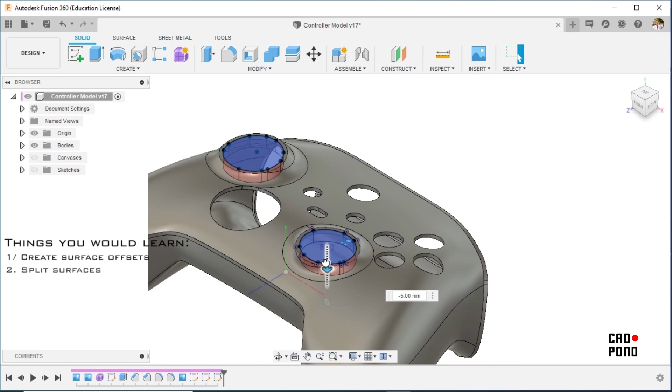In this video, I will be demonstrating how we create an offset surface of our solid body, how we split these surfaces using our created sketches, and how we thicken these surfaces to create the case shells for the controller pad. Then we're going to create different components of the controller casing, and lastly create holes which will be cut into our casings. Alright, so let's get into this.

So right now we have our sketches created from the previous video, and everything is set for us to proceed. The first step is to create an offset surface of this body. So we go to Surface, and then under Create, we see Offset.

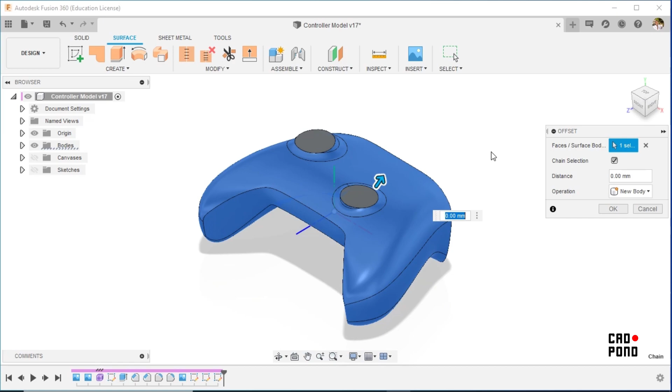Clicking on Offset, we have faces or surface bodies, so I will simply select the body here and rotate to see what has been selected. We observe that these two faces here were neglected, so I would include these too. Having done that, I have a distance of 0, and I say OK.

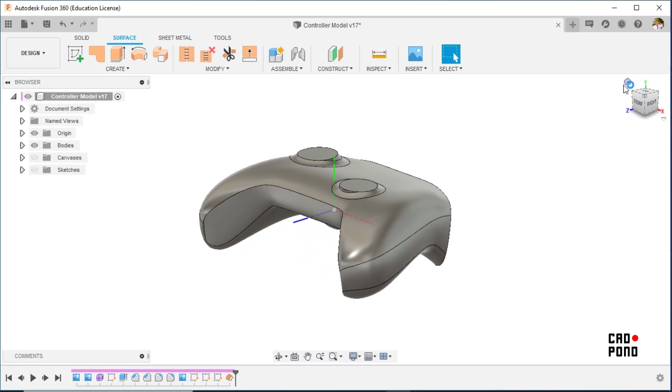Something to know about this particular phase of the project is that creating the casing in any other way right now seemed impossible, which is why we're taking this approach. We're also going to observe some processes that naturally should not be used, but that's what we're going to work with to get what we desire.

Alright, so having done this, we have created our bodies. If I click on this dropdown, we have the surface body here. Next, we're going to create cuts and splits on our surfaces.

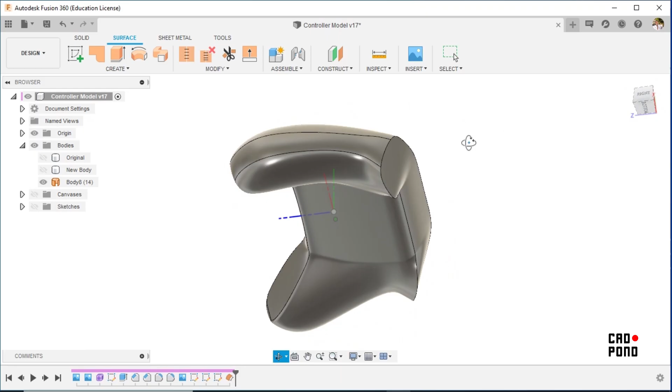To begin, I go over to Solid, Modify, and select Split Face. The split face tool allows us to select a particular face and then also select a particular sketch to cut through that face.

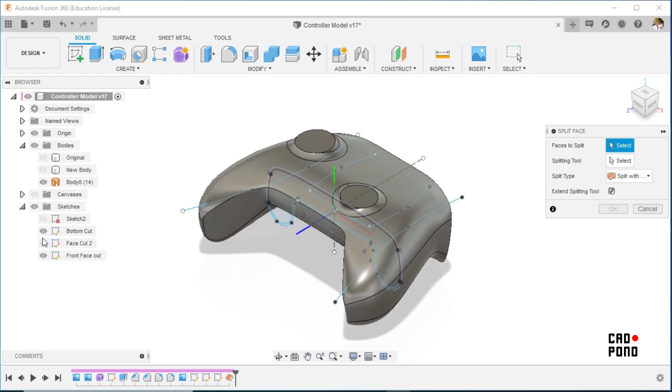For this we need our sketches. I begin with the face to cut — I start with this cut here — and then for the faces to split, I select this face. For the splitting tool, I select this.

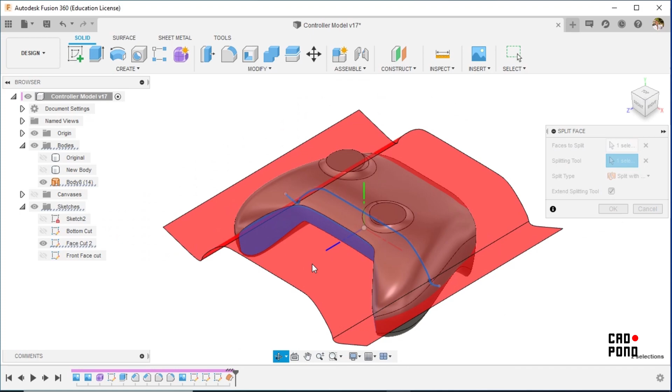I also click on Extend Splitting Tool. We don't have to worry about what else the split tool is passing through, as long as the face to split is the one highlighted in blue. So I click OK, and we notice we've split this face into two parts. It's nice to see this worked properly.

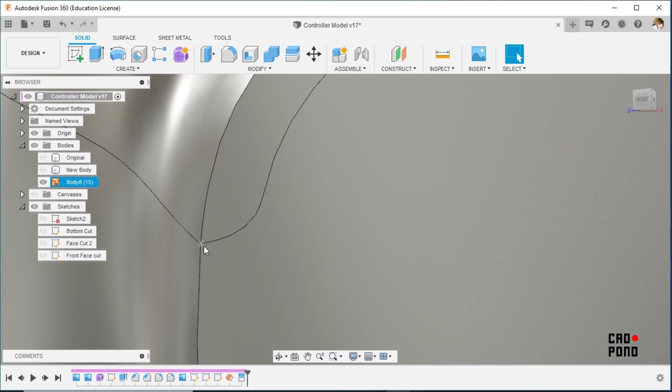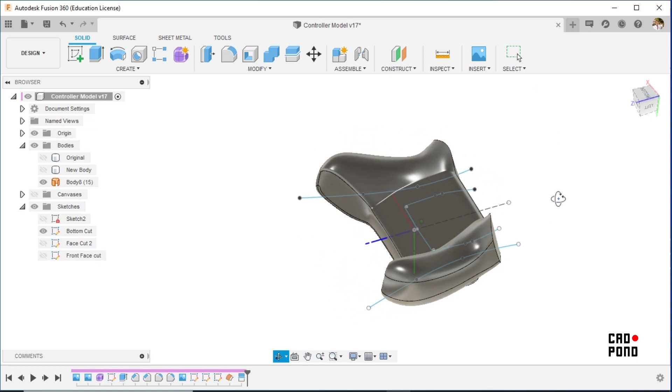And the same thing here. Alright, so we proceed to the next split — this has been used, so we go through the bottom cut. I rotate towards the bottom part and repeat the same process.

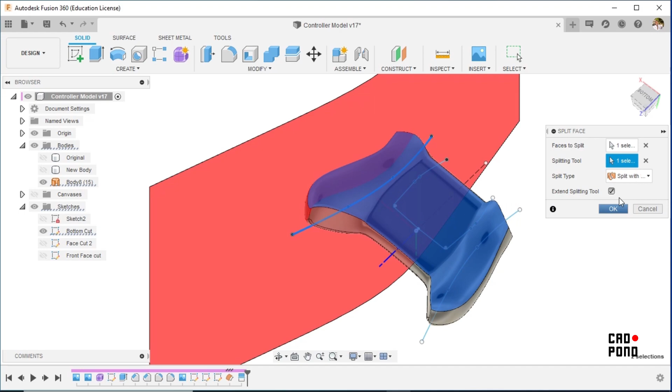Split face: my face to split is this face, and my splitting tool is going to be this one. Alright, I guess I have to split it one by one, so I'll click OK.

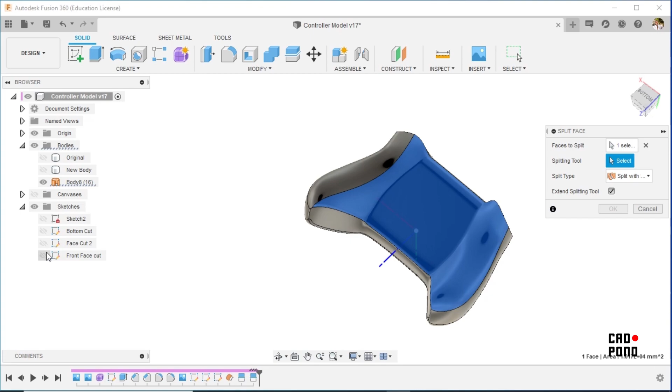Repeat the same process: I right-click, drag up a little, and drop on Repeat Split Face. For this face here, my splitting tool — the bottom cut — is going to be this one, and OK.

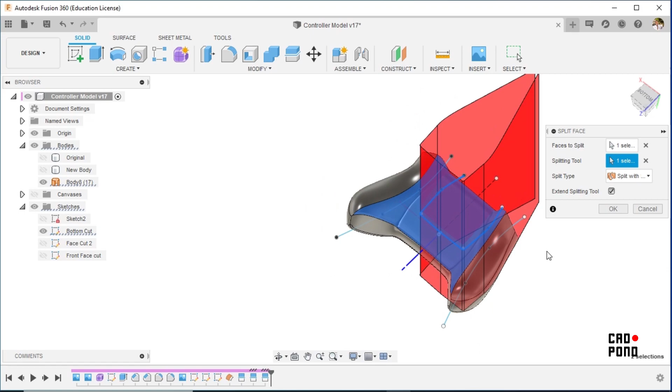And then lastly, repeat the same process here. For this middle face, the split will be this and this. Alright, so we have this, and we are good to go.

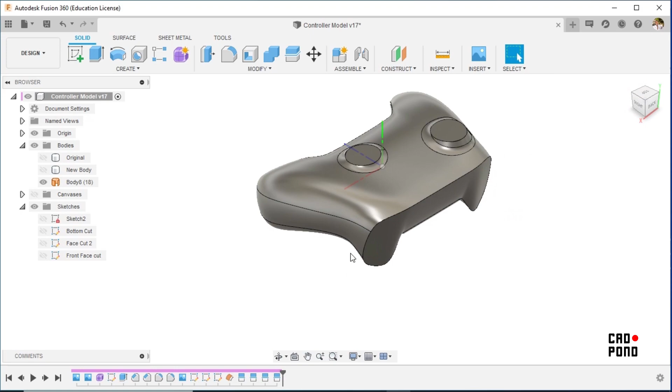So with all of this now, the next step is to cut this face here. How do we do that? I right-click again, drag up, Repeat Split Face, and select on this — it should be this.

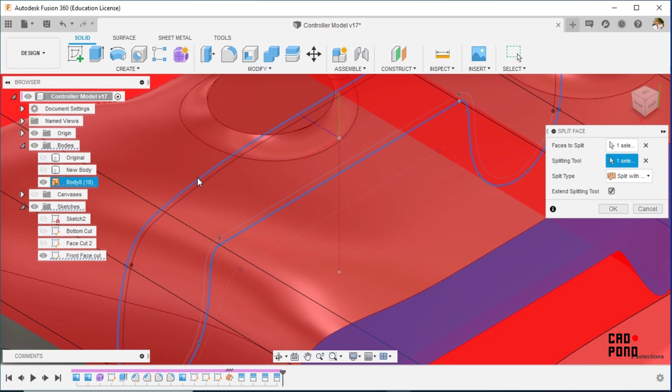Alright, and then we use the split tool outside, not the one placed within. So with that split tool, I click OK, and good enough, it worked well.

Lastly, we repeat the same process: Repeat Split Face, select this face, and this time we use the inner sketch, and say OK.

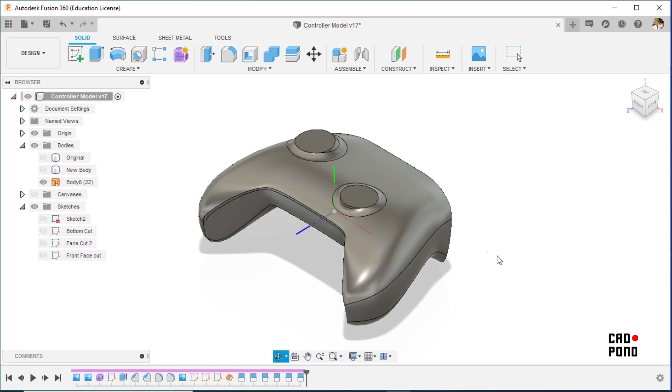Alright, so with all of this done, I'd say we are very close to completion of this video. The next step is to create thickness — to thicken the surfaces we've created, because right now they are simply faces and we will have to thicken them.

Alright, so what we would do first is put all of this within each other. I select from this, hold shift, click on this, and sort them into a group.

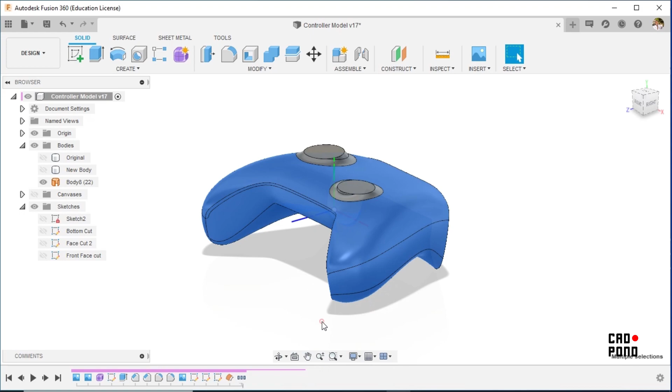At this point we go over to create and then click on thicken. The funny thing is that when we create a thicken feature, the software says to select the face to thicken and specify a thickness value, but it doesn't necessarily create the thicken in the direction we want. It creates it in a normal direction, but not necessarily the one we want. So in the case where we have a surface that is inclined or bent, like what we see here, the thicken feature is also going to be bent, giving us a thickness that is not necessarily parallel to the top plane.

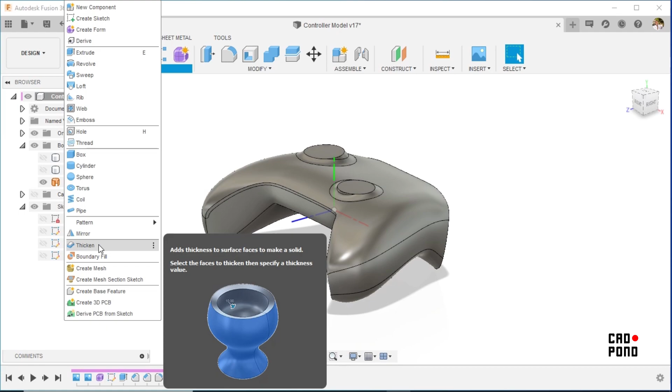I'm not sure you understand what I mean, so I'll just show you. In this process, we are going to thicken our parts, the surfaces, bit by bit, and then use the join command to bring them together. We're doing it this way because any other way gives us an error where the system is unable to compute the thicken feature.

So I'll use thicken, beginning with this top face here. You'll notice it's trying to select all the faces, which is not what we want, so I switch off chain selection and start with this. It's going in the outward direction, which is not our desire, so I'll take this to be minus 1.5 in the opposite direction. Then I say new component and select OK.

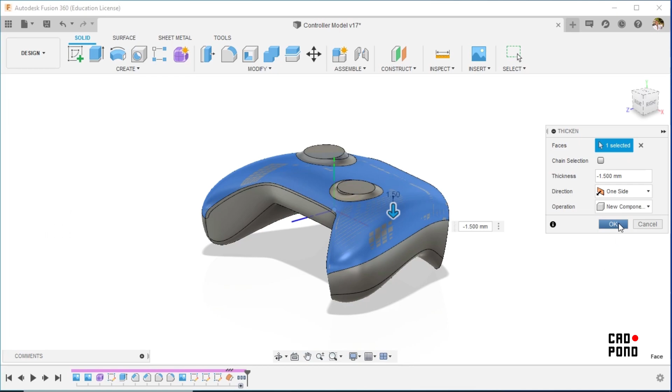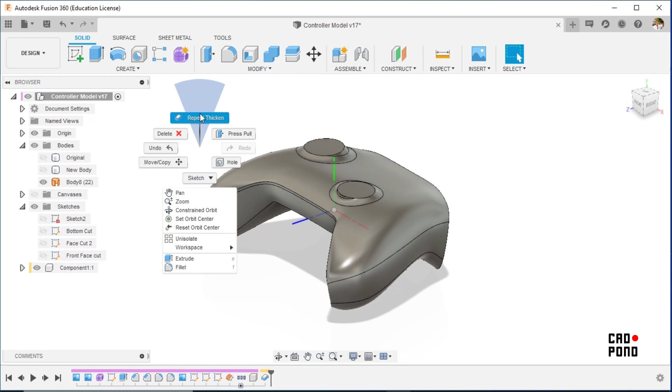Alright, so for now we have the very basic part of this, and this is not all we want for this top face or top case. So we bring back the surface body, make it visible again, and repeat the same process with thicken. Remember the chain selection is switched off, so I select the next one. With this selected, instead of using new body, I say join, and what it does is join what we have to the previous body, as you see here.

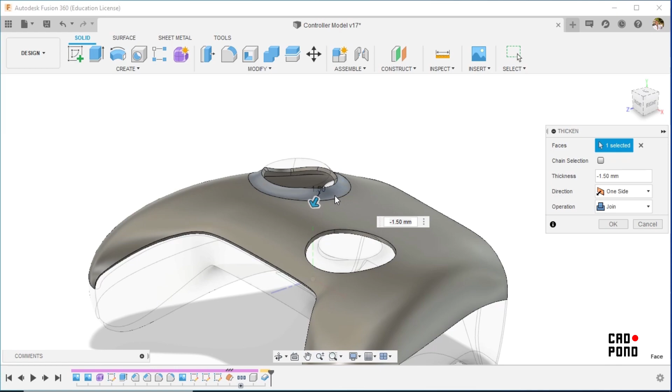Now what I was saying is, if you look at the thicken here, we notice it's not straight in itself, but kind of bent, taking the normal direction of the surface points, which is weird, but we have a way around that. I'll click OK and keep repeating the same process until we complete our top face.

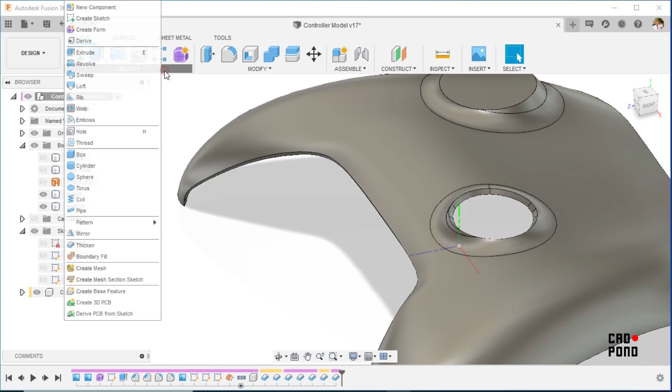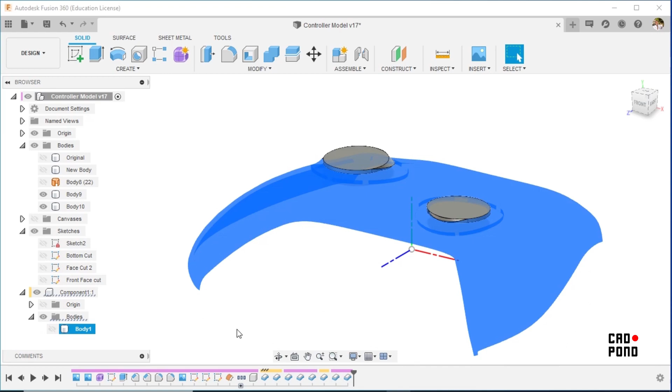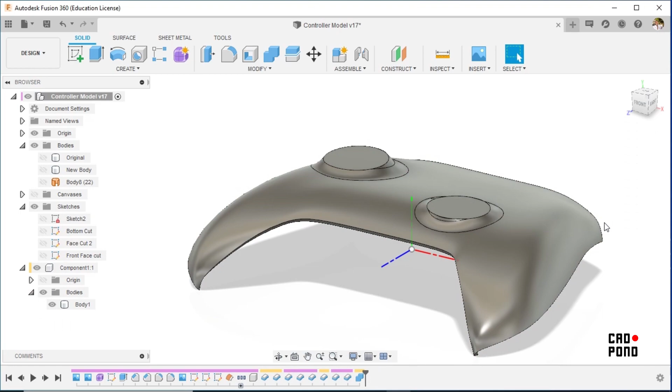Alright, so with all of this now we have just one component, which is all of these top faces. Next we are going to create for the bottom component, and that's going to comprise of everything: 1, 2, 3, 4, 5, 6, 7.

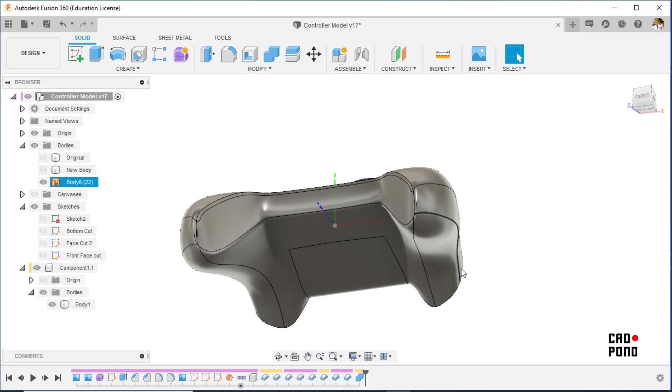Alright, we are probably going to separate them to make it look quite nice. So what I'll do is take this minus 1.5 in direction and call this a new component, and say okay. Alright, so that's this. Then we go over to the rest.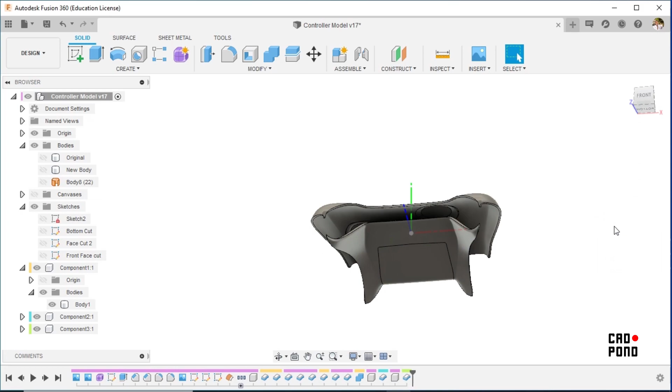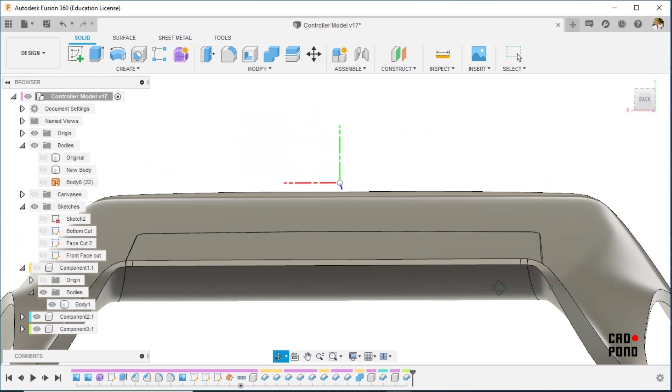See this, alright, create thicken, 1, new component, and so we have this. Let's check how this was extruded - that looks pretty good. If I switch this off, the thickening is quite good enough, except at this point, which I have no idea why.

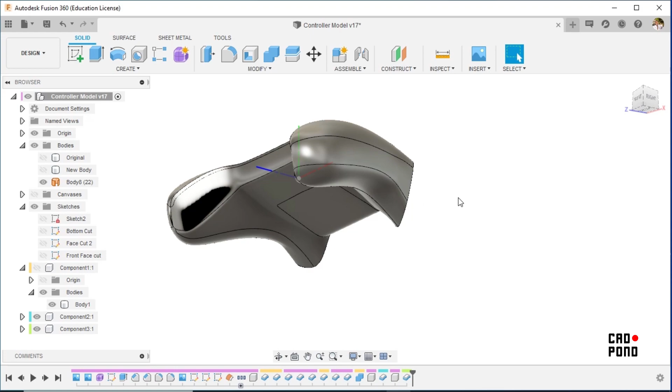This is this way and this is this way. Alright, so that's fine. And so we proceed. Since we have 1 and 2, I suppose I would simply join 1, 2 together with all of this. That's what I will simply do. I'm not really sure how the bodies are assembled yet, so it's going to be a little bit weird what I'm doing right now, but I would include this and join to this component.

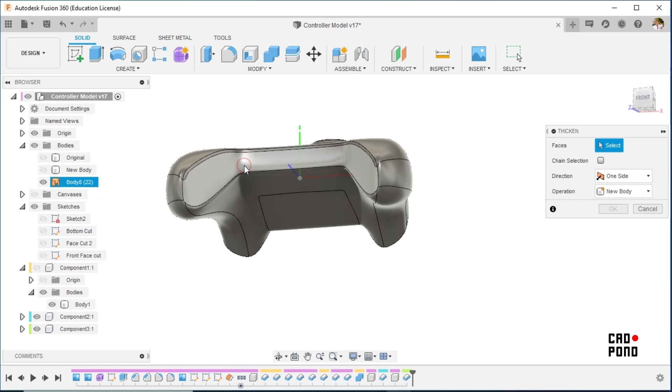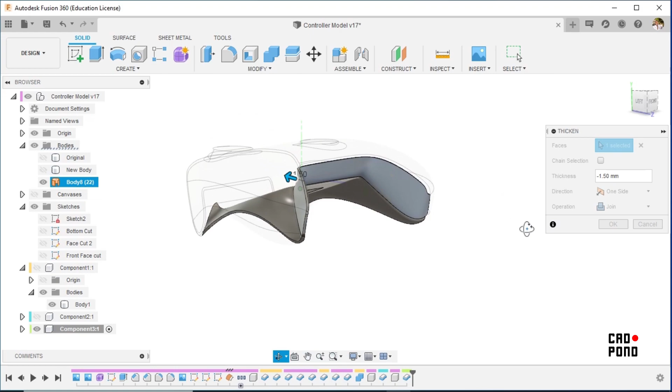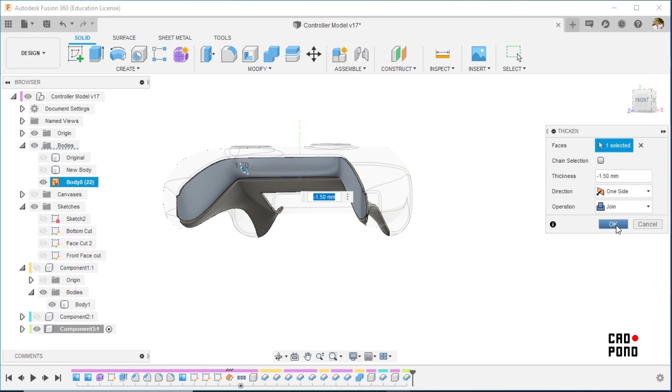So for now I think I'm going to switch off component 2:1, which is this. With this selected, I'll say new body, join. So I'm joining it together with this. I guess the way the software works, because I don't really understand it, is that the bodies that are visible, or probably the previous body created, is what the new component is joined to. I guess so. But if that's what it does, then let's say it's pretty smart.

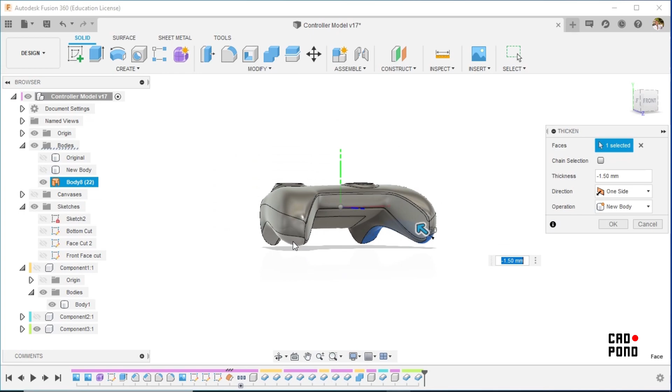Alright, at this point we have just a few things left to do. So I would create thicken again, repeat thicken, and select on this. Let's see if I can also select on this. Alright, so I guess I'm not allowed to do so. So I would cancel this and simply select on this face, going inwards by minus 1.5.

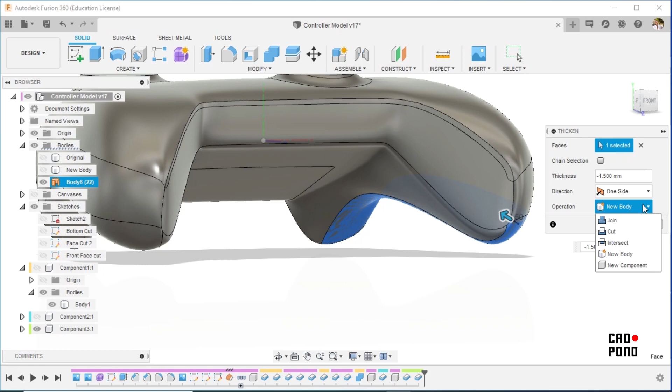And this should be, let's assume, or you know what, let's join it together. So right now I have a reason for doing that, and later on we are going to figure that out. So I repeat the process for the rest of the faces remaining.

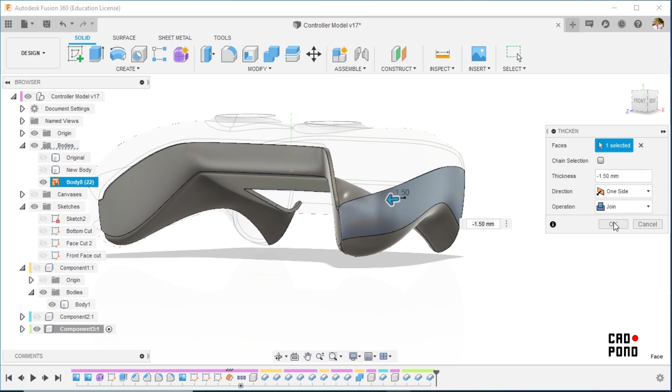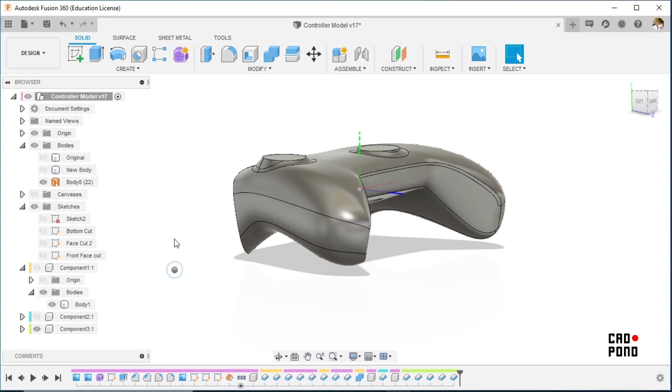So we have this face, join, and okay. And lastly, around this corner, body, right click and drag up, repeat thicken, this, join, and okay. And then this face, join. Okay, so at this point we have our bottom face, our bottom component, the cover here, and we have the top component also.

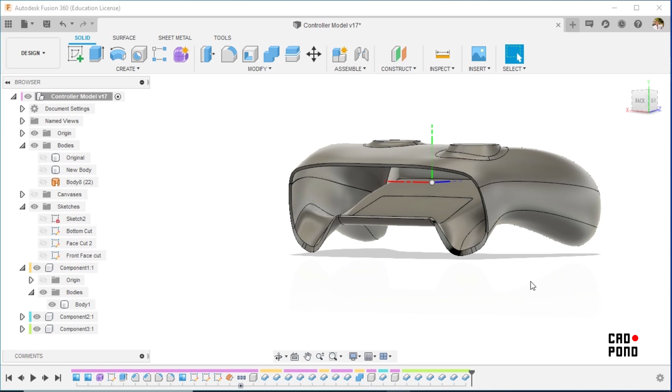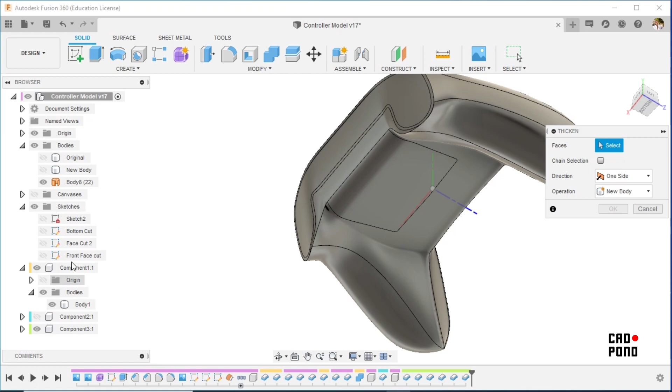However, we don't yet have the back part of this here. So what we would do is simply switch this back on, and this is going to be joined together with this body. So if I right click, take it to repeat thicken, I switch this back off, I switch this component back off. So what we have is simply this, right?

So what I'll do is I'll select on this face. Let's see how it creates its thickening. Alright, so it's a little bit weird, and I guess we're going to have to make some slight changes to what we have right now.

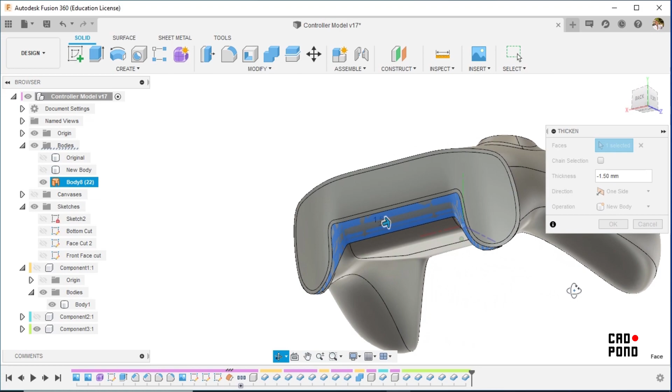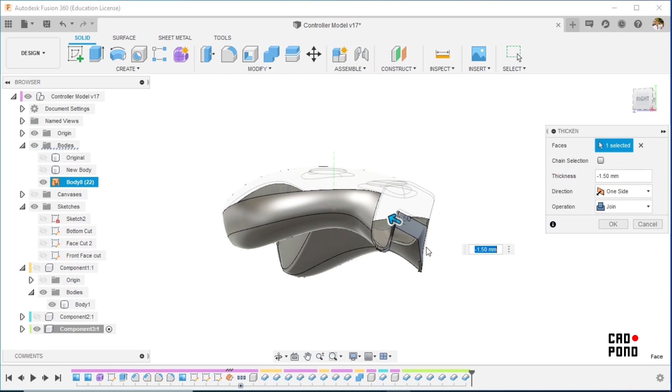Let's see. Alright, you know what? I just have to cross check what we have here. It's cutting in this way. So, alright, no problem, we create join. So we're joining it together with that body, which is this way, right? And I would say okay.

So to confirm all that we have, let me bring back the components. So we have it this way. Yes, and yes. And lastly, we're going to create an extrusion for this face here.

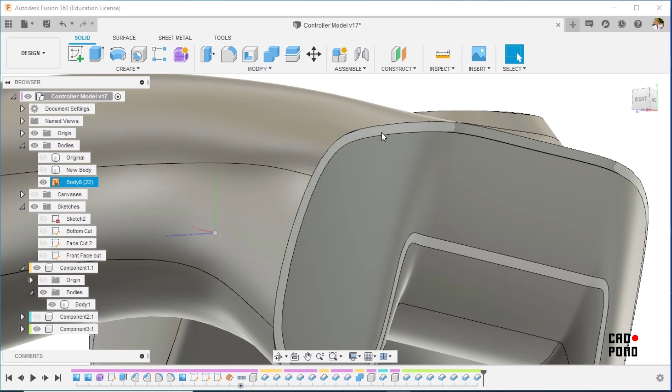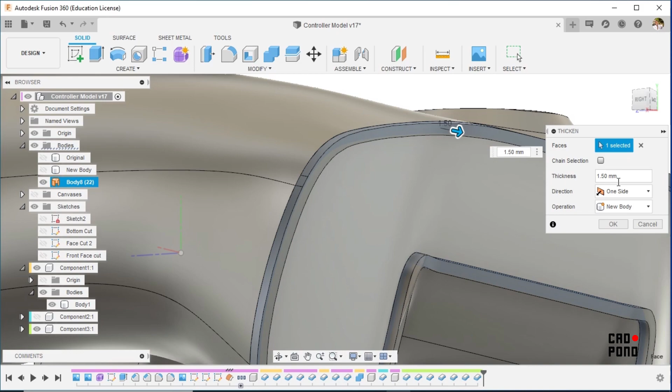But for this face, I suppose it's impossible for us to thicken that, because I tried a number of times and it was not working the way I needed it to. So if I made this 1.5 going outwards, it actually does work. That's great. So we click on new body and okay.

And then with that done, what we will just have to do is to join this body together with this. So we need combine. This is the target body, and then the body to join together with it, it's going to be this body here. So the second body is this, and say okay.

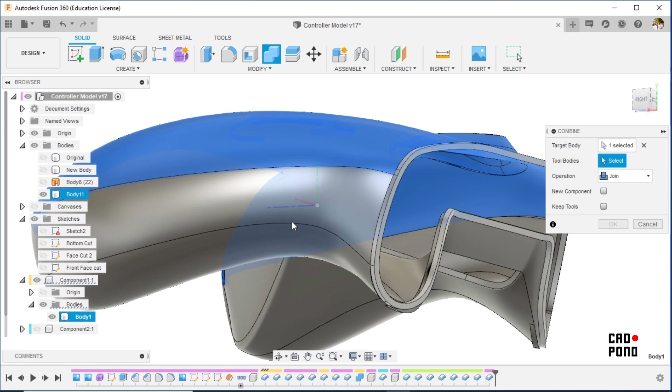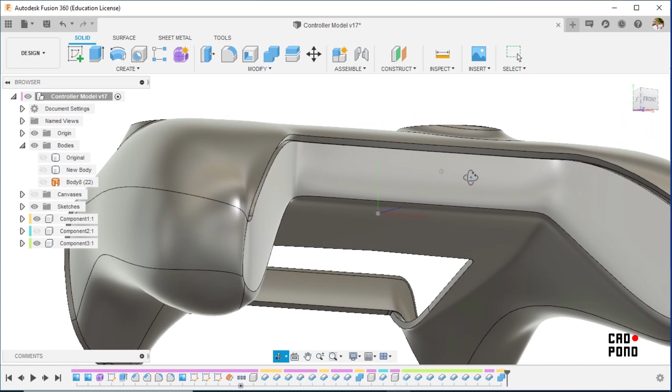So for now, this is what we have, and we proceed to the last part of this video. So at this point in time, I have actually missed out something. Alright, so to do that, remember the parts that was cut out here, I haven't included that.

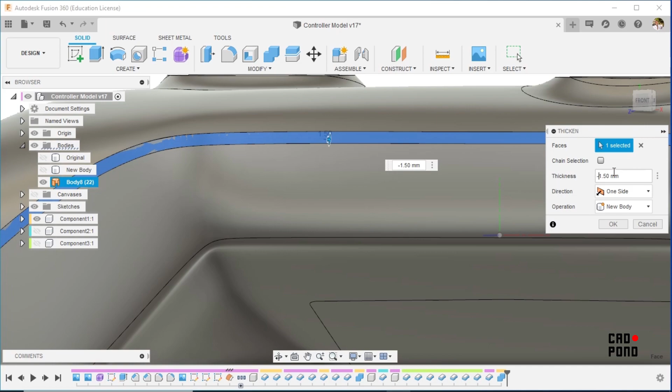So I pick up my body again and say create, thicken, and this is a face to select, and it's going in minus 1.5 millimeters. That's this going inwards, and then I want it to also join. So hopefully it's going to join to the proper component, I suppose.

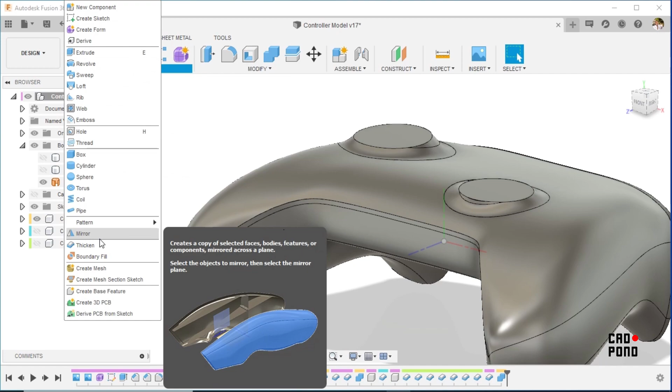Alright, so it doesn't, which is kind of a bummer. So what we'll do is I would say create thicken. I would create it separately. That's this face, minus 1.5, new body and okay.

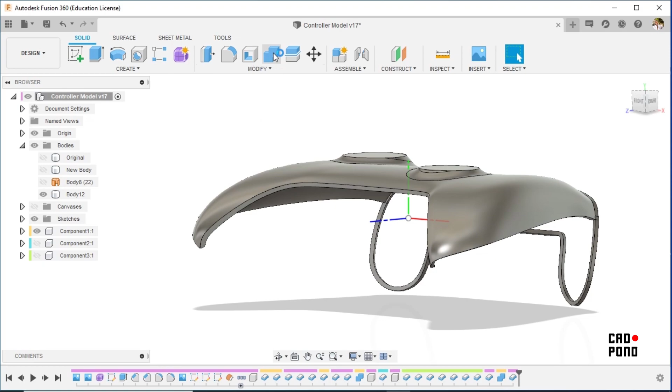And then I would, where is it? So I would merge both of these bodies together now. Combine. This is the target body still, and then the tool body is this. Alright, so you do see that it gets a little bit weird. So I guess what we can try to do, let's assume that this is done. Not here.

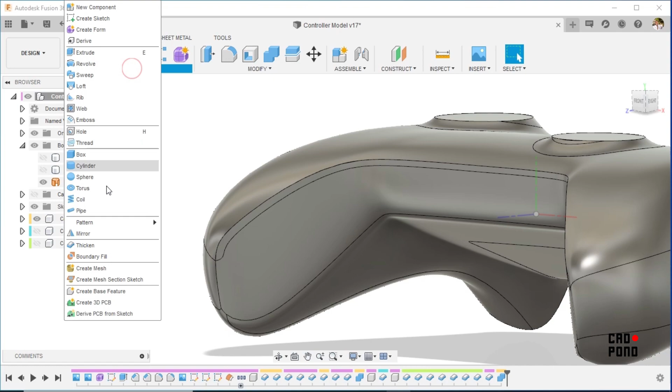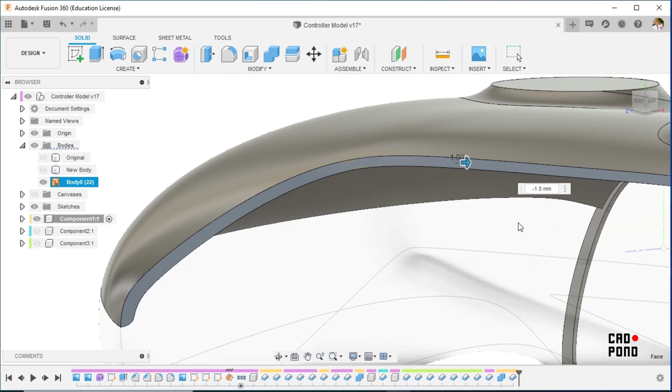Create and thicken this face, and let's say something like 1 millimeter. Hopefully it could do something good. Not so sure. Alright, so we just stick with 1 millimeter. I really don't care anymore. Alright, so this is what we have.

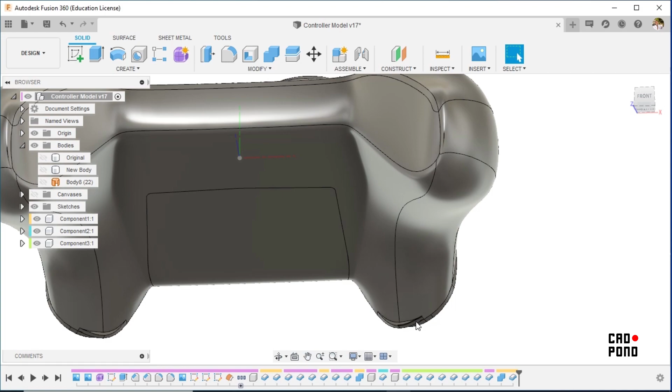Alright, so this is quite nice so far, and this seems like what we actually intend to achieve. However, we have a little bit of an extrusion here which we would have to cut out later on. But to complete this video right now, the next step to take is going to be to utilize some of the sketches we created earlier on, which are these sketches. So what we simply have to do right now is just to cut these sketches into component 1.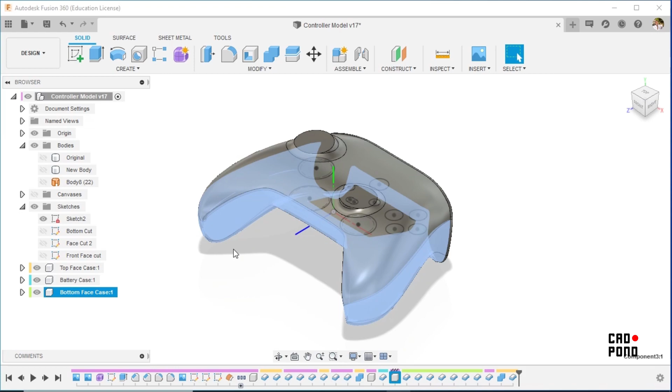So I'll try to just rename this top face case. So let's see what this is. This is battery. I'll call it battery case. And I'll call this bottom face case. Bottom face. Alright. Okay. So it's time to cut up our body.

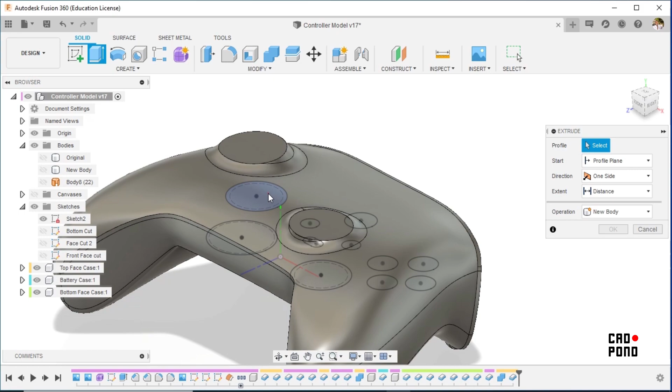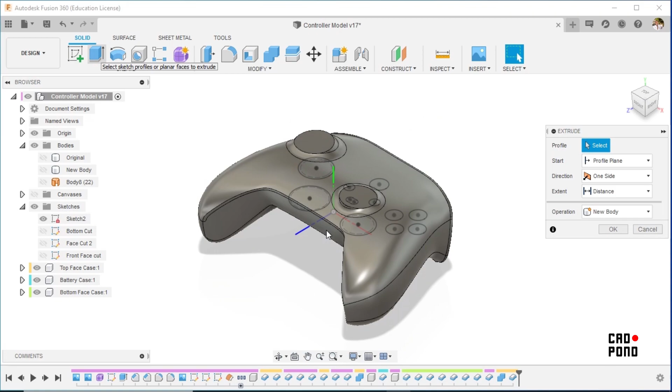Extrude. I would select the profiles to use. Let's see what this looks like from top view. So this is a little bit not nice. It ought not to be this way, which means that somehow this shape has been changed, I guess during the modification of the freeform body. So to create our extrusion, we would not work with this right now. So we create the extrusion using these faces.

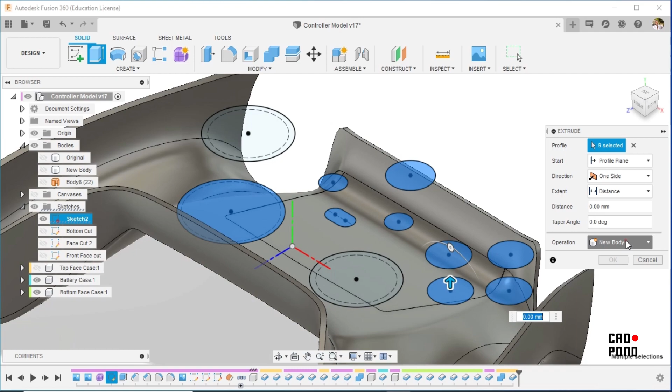1, where is the body? 1, 2, 3, 4, 5, 6, 7, 8, and 9. So it's supposed to be a cut extrusion. And so this is here. I drag this upwards. Alright, and we have this with us. Okay, so if we check the objects to cut, we have our top face case.

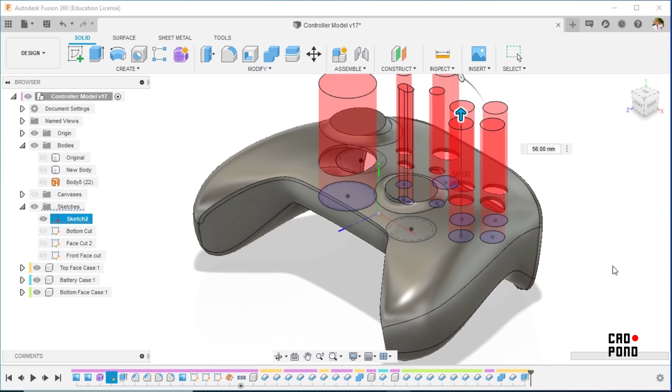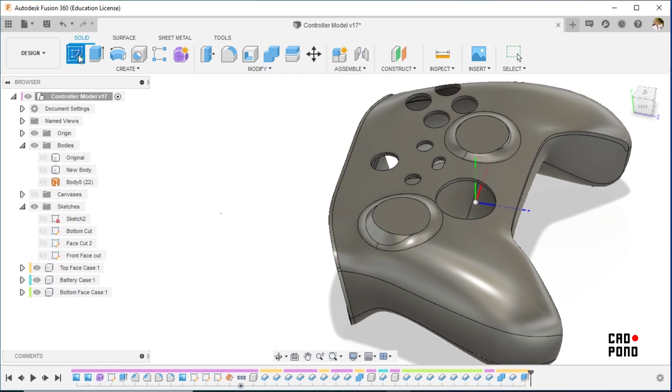Alright, so at this point we would simply just do something which was not initially the plan, but that's going to be to cut our holes here for the joysticks, and it's going to be done in a kind of weird manner, but we just have to. This is not the ideal way, and this is actually not the plan, but we're just going to have to work with this. So we're going to create an offset of this edge here and drag it in by 1.5, right, and say okay.

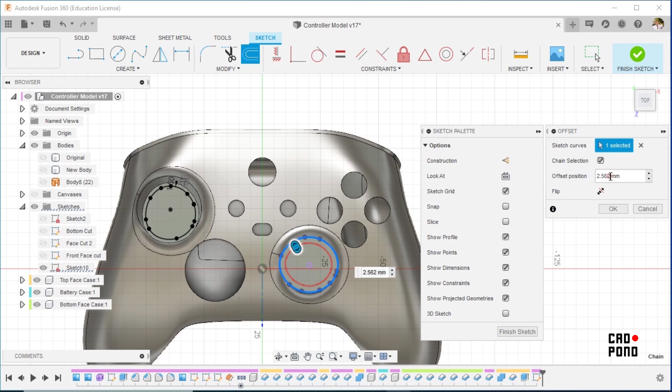Looks really weird. And I'll repeat the same process here. I have no idea how I managed to screw this up, to be honest. I need this offset of this sketch, so that's not possible. So what I'll do is I would create a projection of this. Okay, then I create the offset for that, coming inwards 1.5. Alright, this, double click on this and make this a construction line. Finish this sketch. I would call that sketch weird unplanned sketch.

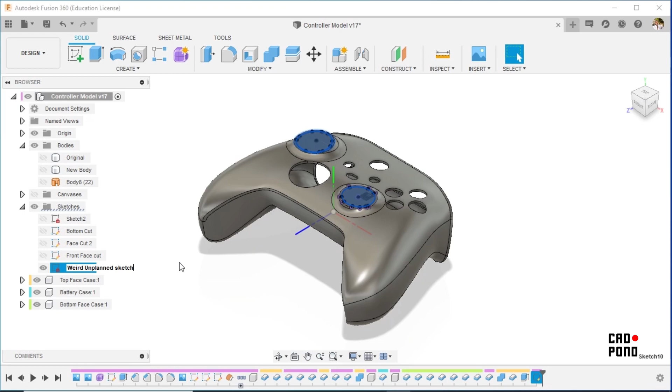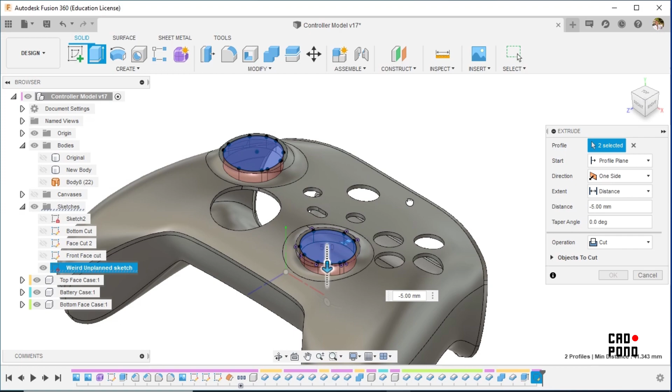Alright, and lastly we create our extrusion to cut through the top face again. So this is cut, and I'll drag this inwards just a little bit. Alright. So this is what we have. Great. And this, my friends, is where we bring this particular video to an end.

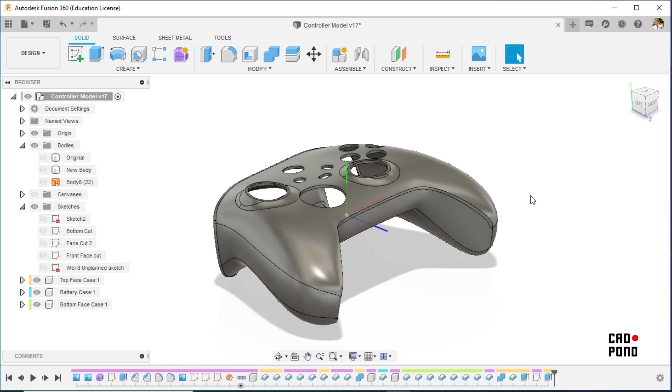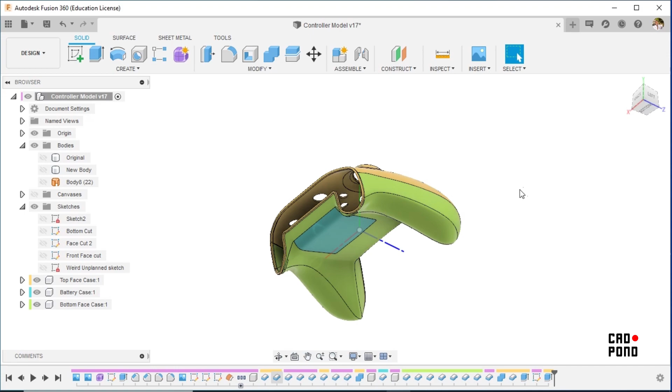So to check upon the different components which we have, we notice that we have this: the top face, which is yellow, the bottom face, which is I guess cyan, I don't know, and then the battery face, which is this. I think this is cyan and this is something green, but this is what we have for now, and I think it's pretty good, the level at which we have gotten to.